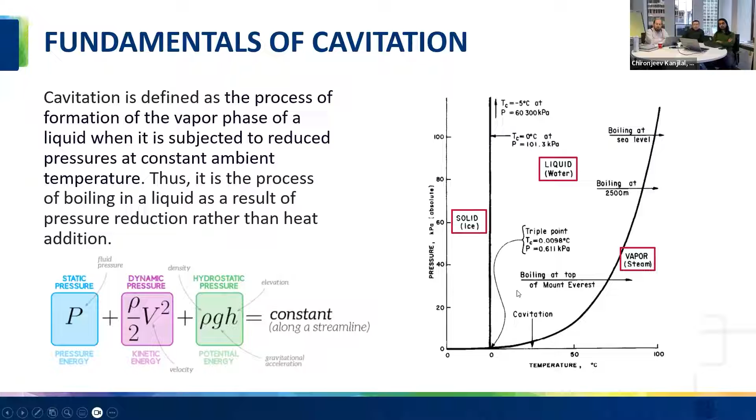Come back to the diagram. Basically, when we increase the velocity, the pressure will drop. And if the pressure drops below this line, water will enter the gaseous phase. We call that cavitation - basically, small droplets of water within the body of that water will bubble up, and that's what's called cavitation.

However, as we close in on the offset, the actual distribution of water velocity across the depth of its body will change, and velocity immediately downstream of the offset will increase substantially. Remember, the square of velocity will make this change even worse, even larger. So the pressure will drop substantially, and that's what happens in this eddy immediately downstream of the offset.

Let's imagine that this is a spillway chute, and we have two slabs that are not really joining at the joint. The situation will immediately switch to a cavitation situation.

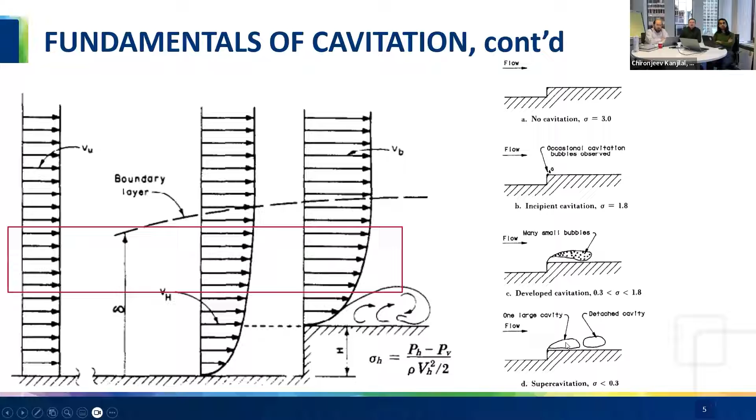Why is that important? That's why cavitation happens in the first place. The problem with cavitation is that it's very temporary. The bubble forms, and immediately due to the rest of the water body exerting pressure on it, it'll collapse on itself.

No concrete can withstand that, and even steel is dented by this because it's basically a shock wave at super speed from the actual process of collapse of the bubble. Then, when collapse happens, the local velocity around that collapse increases again - so basically, it feeds on itself, producing another drop in pressure and another bubble in the water flow.

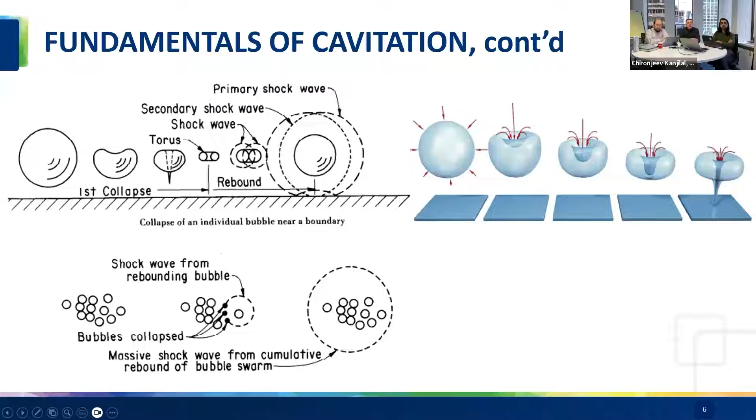That's why we have damage to the structure, because it is like a jackhammer on steroids. It starts chipping off the surface of the boundary. This is how it looks and where it happens. It happens in both offset into and away from flow.

Those are the first two examples. It also happens on the curvature away from the flow. Usually what happens, even in well-built spillway chutes, also on an abrupt slope away from the flow, damage happens immediately downstream of the change of surface.

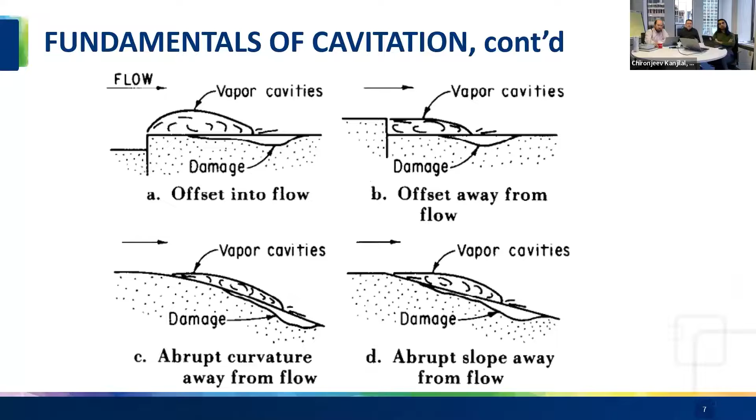Two slabs have to be built separately because that's how we build chutes. It would be ideal if it were all cast in one piece, but that's practically impossible. And also, if you remember the previous slide, even in solid and continuous structures, due to some other issues, we can have a roughened structure and cavitation will happen regardless.

So in this case, the slabs were joined properly with rebars and dowels across the joint, to prevent differential settlement between the two slabs. However, cavitation happened due to the roughened surface and the mere existence of the joint. So the cavitation eroded a lot of concrete all the way down to the rebars and all the way down to the water stop, as you can see here.

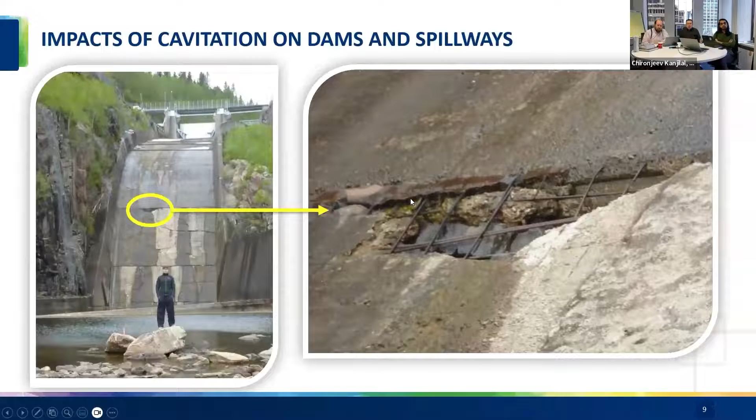So this is my last slide on cavitation, showing what can happen first. We have erosion of a concrete slab to the extent that now we have an opening that will allow access of water underneath the slab. So in that time, the process of uplift on the slab due to just access of water underneath it will happen. So now it's time to talk about the uplift.

We have no drainage on this structure, so this is a natural condition in a good foundation of the dam. The uplift will have this form because at the upstream end it will be equal to the hydrostatic pressure exerting at the upstream face of the dam, and at the toe the same from the downstream side. The straight line tells us that the pressure is dropping due to the hydrostatic drop across the foundation of the dam. That's not always the case, and we will see that on the next slide.

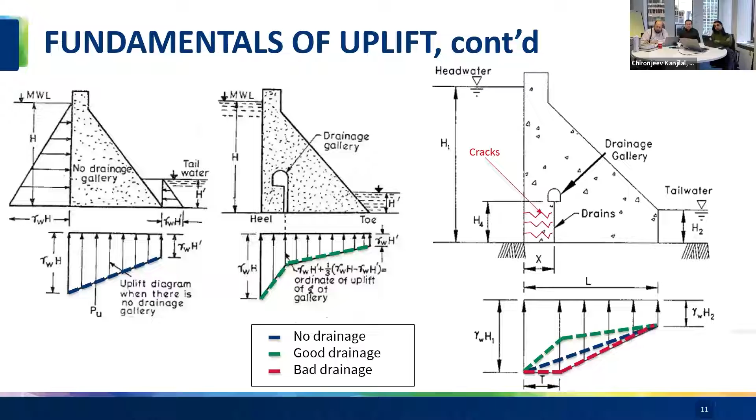If it can move structures like this, it's not a surprise that when water enters the cavity underneath, even if the drainage is done properly before cavitation opens holes in the slab, water entering holes underneath the slabs can easily lift them. After that, it's all erosion and forceful removal of the slabs and substrate material.

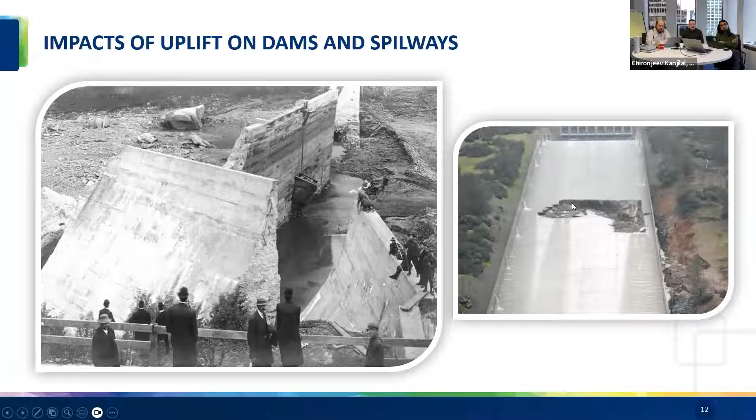So on this diagram here, shown more clearly to the right, it's the same diagram. We're showing all the forces that are exerted on a joint between two slabs.

We have cavitation that works from the top, uplift that works from the bottom in the upward direction, and ice cycle that makes the whole process worse because it will erode concrete even more, especially when it's cracked or has voids inside. And water flow forces, because now, due to the offset in the slabs caused by uplift and cavitation, the upstream lip of the slab is now exposed to the forces of the flow.

How do we prevent this? First, we have to prevent two issues: cavitation from the top, and with drainage, prevent the uplift pressure on the slab even before the joint is offset.

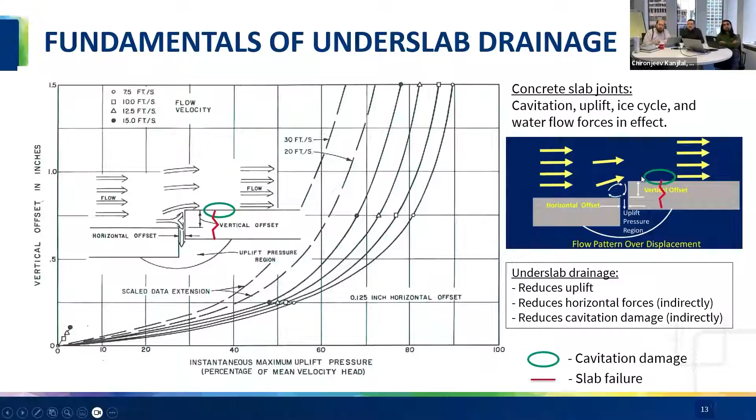Proper drainage, which my colleagues Chironjeev and David will talk more about later, will prevent the uplift, and by that, indirectly reduce horizontal forces on the slab due to the force of flow, and reduce further cavitation damage because the offset will exacerbate the process of cavitation at the top.

On this picture, we can show what the end game is here. The cavitation started at the joint between the slabs and damaged it even more because the drainage at this site, Oroville Dam in the States, was not properly done. So we damaged the first slab, and from there it's all downhill.

The first erosion and removal of the slab will aggravate the situation even more, and in the end, the sheer flow of water will erode the foundation and remove the rest of the structure.

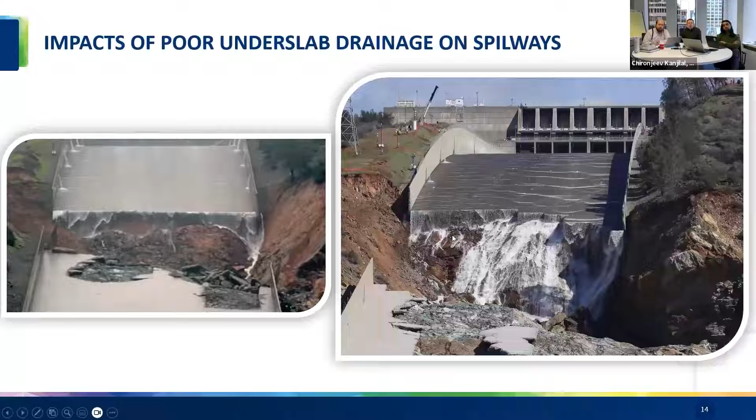So this is the end for my presentation.

Chironjeev and David will talk a little bit more about the actual practical issues with design of the drainage underneath and around the structures. But this is the time to actually hear some questions, if there are any.

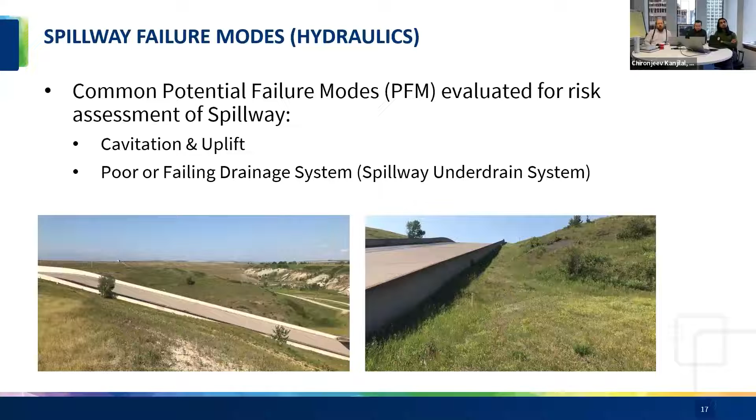So first thing is, when we look at different spillways, there's different failure modes that we explore and review. Today, I'll be concentrating on two of them. The first one is cavitation and uplift, which Dan explained the science of. And then I'll present about the poor and failing drainage system, things to look for, and how to potentially address some of these issues.

So I brought, for this presentation, some examples that are specific to Alberta. The first one here on the left-hand side is the Waterton Dam in Alberta. And as Dan mentioned, typically cavitation issues develop around the joints of the concrete.

You can see here, these are cavitation issues being so close to the edge of the joint. They are happening upstream, and as Dan mentioned, although for the most part these issues do happen at the downstream end, depending on the roughness and the geometry of the surface, they can actually migrate also upstream of the joint themselves. So when you visit a spillway and do your walkthrough, repairs are signs to look for, and then look at the joints and what's happening around those. Look for differential settlement between the joints themselves as well.

The other dam that I'm showing here is an old spillway that was eventually abandoned. But you can see how this St. Mary Dam spillway was constructed, and soon after construction it started to fail in many ways, and there have been many repairs done to it. You can see at the end they added a lot of anchor bolts to try to keep the slab down.

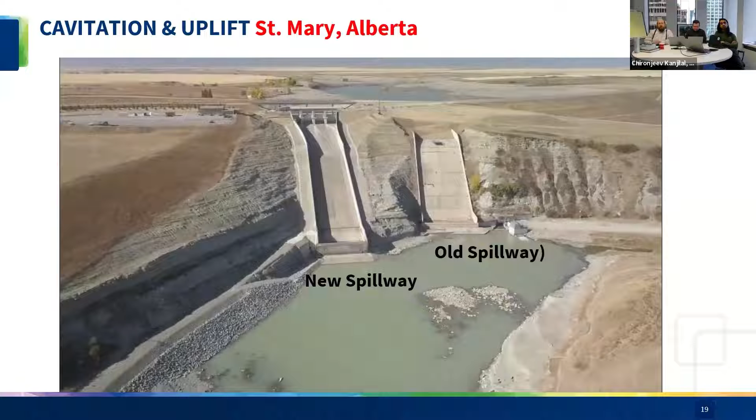One thing to notice right away is the change in the slope. The old spillway is very steep, and this steepness does not help. It's a lot of energy that the spillway has to handle and translate from the upstream end to the bottom, to the downstream end. So trying to reduce and make more gradual changes, I think, is good design practice. Anyway, just wanted to show you how a poor design can lead to a very expensive solution, all the way to having to reconstruct the entire spillway itself.

Now, how do you prevent cavitation? There's a good textbook, Hydraulics of Dams and Reservoirs, by Fuat Senturk. It basically highlights the importance of aeration. If you're able to get about 7 to 8% of air supply in your flow, you're basically able to prevent cavitation. Now, how is that done?

Now, as with anything, these ducts and corridors that are added to the structure need to be inspected. You need to make sure that these are functioning when they need to operate. In Alberta, for example, where temperatures drop significantly below zero, and where you could have an early freshet, some of these aeration systems may be completely frozen. So it's very important to always inspect these and make sure that they are ready for the freshet, for example.

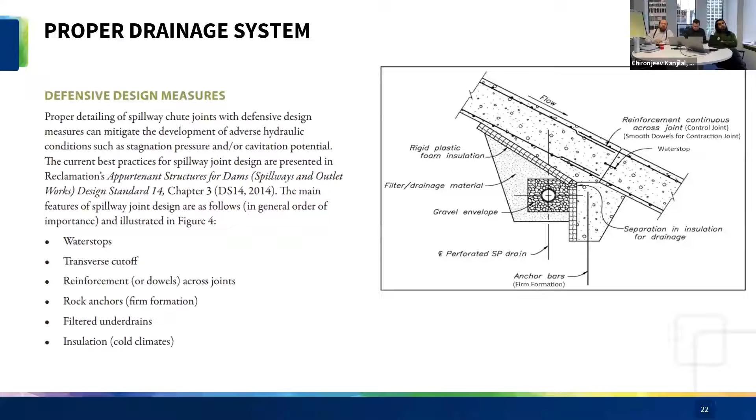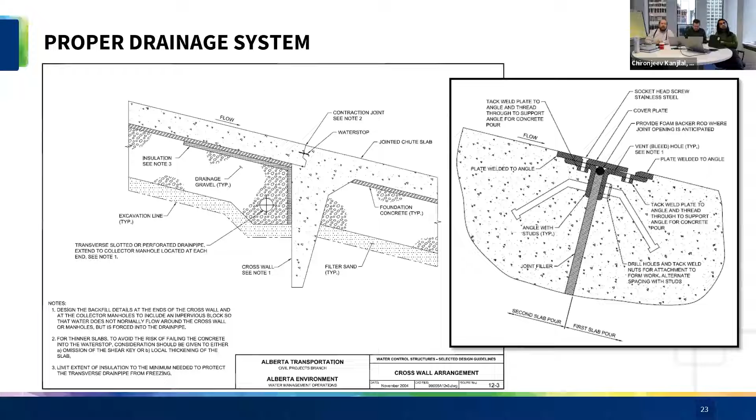So these are things that need to be maintained and looked after for the duration of the life of the structure. Now, one thing that I really enjoyed reading recently is the independent forensic report that was done for the Oroville Dam.

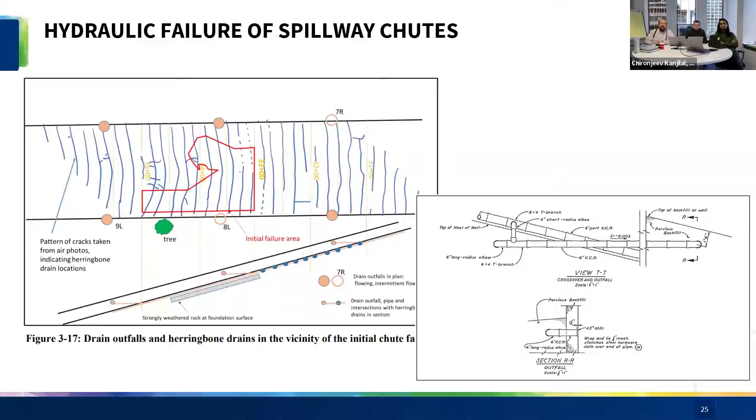Now, these under drain systems were older, and back when these were installed, it was the technology of the time - they used vitrified clay pipes. That was the solution they had at the time. Nowadays, we wouldn't dare doing that anymore - there are too many joints, and the joints don't have gaskets, so they leak. Again, that's not a fault of the design itself - I think the concept was good. The issue is that there was not enough drainage to handle all that water.

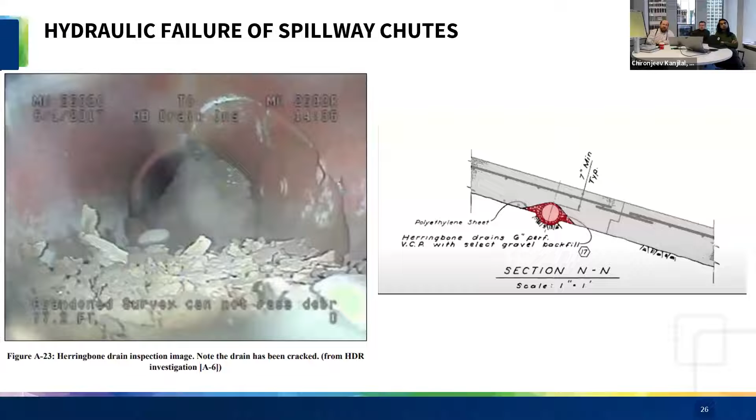Now, if you look at the other figures I've extracted from the same report, the under drain system on the left-hand side here, you can see it had collapsed. Vitrified clay pipe is a very brittle material, so even during installation itself, it's very easy to break them. That's obviously a problem - if your under drains are plugged, they will not work. The other thing too is they were installed underneath the slab, thinning out the actual thickness of the slab. The area highlighted in red around the under drain is just not enough area to hydraulically allow the water to migrate from the surface underneath into the under drain system. So it's always very important to make sure you have enough area there to allow that to happen.

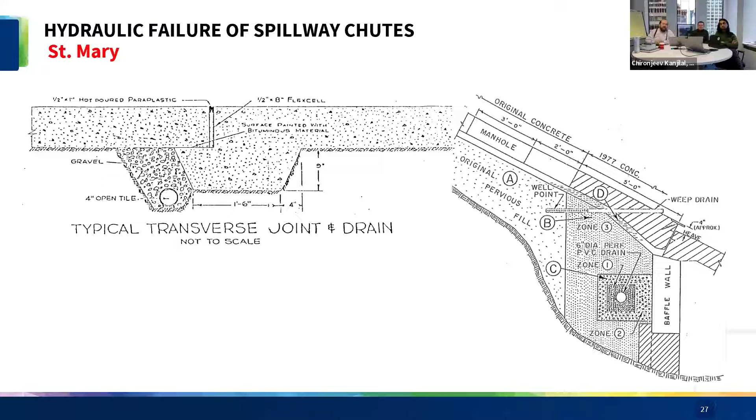Now, this is the new spillway at St. Mary. There are now inspection chambers or manholes, allowing people to take a look at the under drains, see how much water is getting out. This is the picture on the right-hand side - the very bottom of the system. You can see the under drain on the left-hand side, the green one - there's no marking on the concrete suggesting there's no water down there, which is great. Then the larger one, there is a little bit of seepage, but now having access to the under drain, one can go and inspect, maintain, and clean these under drains.

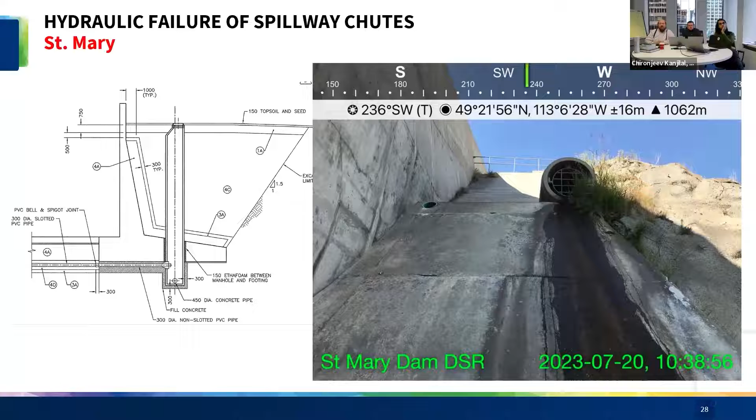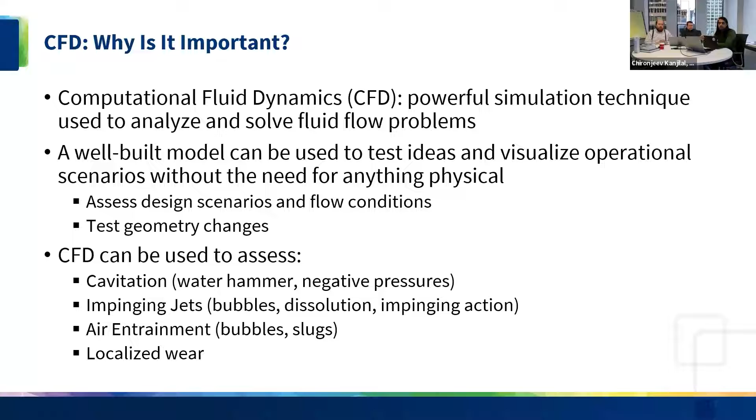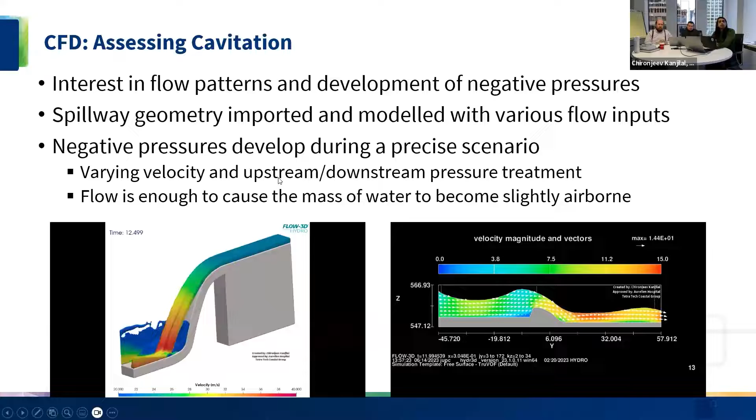In this sort of scenario, you can also monitor the flow upstream and downstream, and if you build the geometry accordingly to account for that loss that causes uplift, you can estimate the amount of uplift that would happen on the downstream slab.

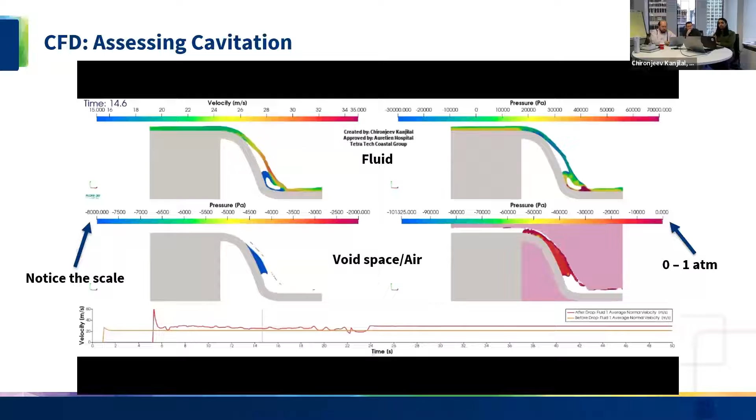You can also take a look at the flow patterns in terms of the velocity vectors, look closely at where wear might occur, and also take a look at things like turbulent kinetic energy and shear.

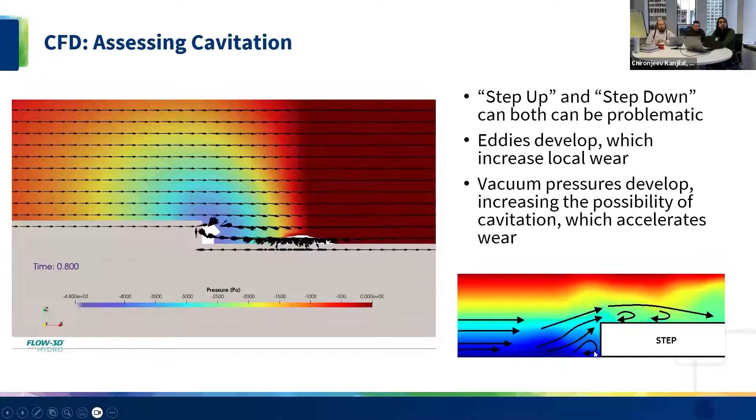In the example on the right, this is essentially the same thing. I've illustrated the vectors here and shown the step up, but the colors represent the pressure and the disturbance, and the eddies that can form at the corner, causing those horizontal forces that Dan talked about, and how cavitation might occur with the velocity change downstream of the step.

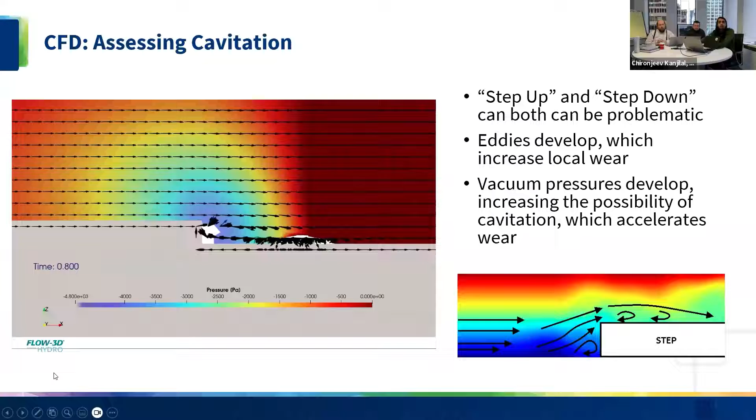And with that, I will give it back to David, who has an anecdote for us, I think.

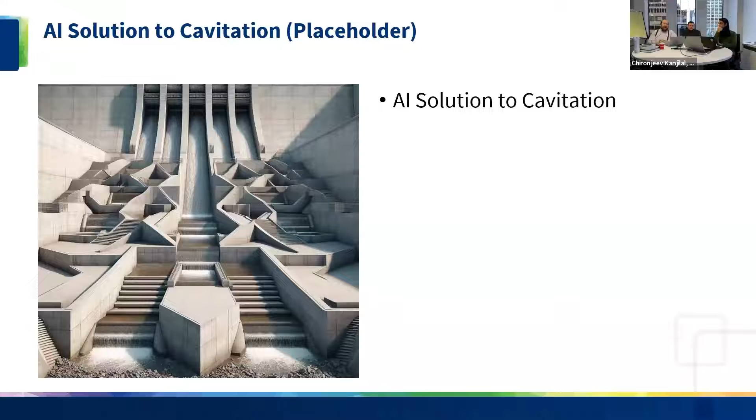That said, I admit it shows the importance of aeration within your spillway, and the importance of adding steps to reduce that energy. Now, I think this would look very good for a water park for kids, but again, I don't think I'll be out of a job anytime soon.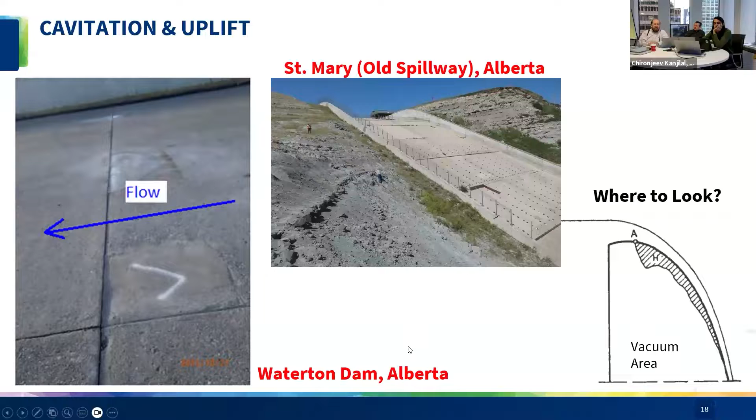So it's right at the top where you have the transition, where you have the greatest changing rate. Those are the areas where you want to introduce air, and that will help prevent cavitation. So in that figure, at point A, that would be ideally where you put your aeration system. In addition, air serves as a cushion within a water body because air is compressible, so it reduces shock waves. Shock waves are in all practicality removed if you have air at atmospheric pressure introduced into the flow.

All right, thank you. One last question before we continue. Can you discuss the merits and challenges of defining anticipated real world performance and extent of cavitation using either CFD or physical models? They both have their advantages and disadvantages. Any thoughts as to which method is preferred over another?

I didn't really talk about this much, I guess, but let me just read the question at the same time. Oh, it's not. Oh, sorry. I guess it sounds like essentially CFD versus, or any sort of software versus a physical model.

Ideally, you can use models like CFD. The advantage is you don't always need a physical model to accompany it if you can validate the system. So if you have an existing spillway, if you can validate the flow conditions for how it has historically operated, then you can have a high level of confidence in the model, and assume it's going to be quite reliable if it's replicating those conditions. Then you don't need the physical model because the model is validated to the system. Any changes you make should be representative of what you should see.

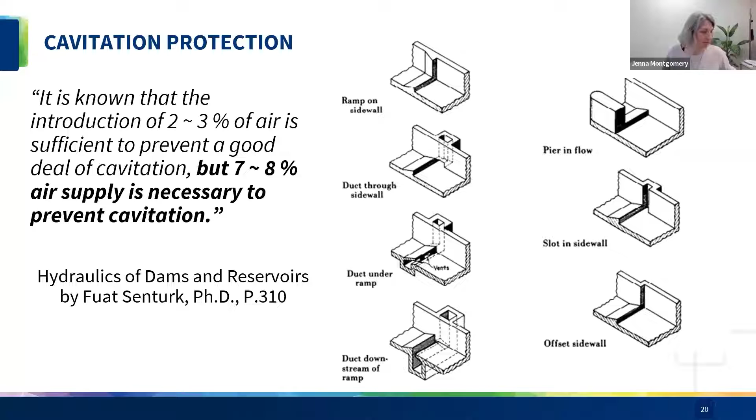Great, thank you. And I guess we'll move along. Bozena, I think you're up next.

Okay, I've just answered the prompts here. So we had the fundamentals of cavitation and uplift, and cavitation affects the top of the slab, and the uplift affects the bottom of the slab. And then, of course, there are drainage issues that were all discussed, and this is how I want to tie my concrete and grout to the presentation. Because ultimately, all these failures, whether it's faulty design or change of conditions or anything else, result in materials failure. So this is your concrete.

That could be your grout. There could be construction issues. This is why I'll be talking simultaneously about concrete and grout, and new construction and old construction, because especially in new construction, selection of material and construction practices can make it or break it. We can design to the best of our knowledge, but ultimately, if material fails, it's a failure.

Now I'll quickly touch on concrete material selection. There are a lot of things. There are CSA standards. There are structural considerations where the main consideration is compressive strength. And then there are also environmental considerations when we look at durability, such as high sulfate content in the soil, alkali aggregate reactions in rocks, but also climatic conditions, especially freeze-thaw that can affect the surface quality on top of roughing from the cavitation.

And then, of course, there are placement requirements, such as flow around the steel reinforcement since it's reinforced, maximum aggregate size selection, and concrete consolidation, very important. And what is even more important is how do we construct the joints. We cannot construct anything in one simple pour. So when previous speakers were talking about failures, they usually happen in the area of joints.

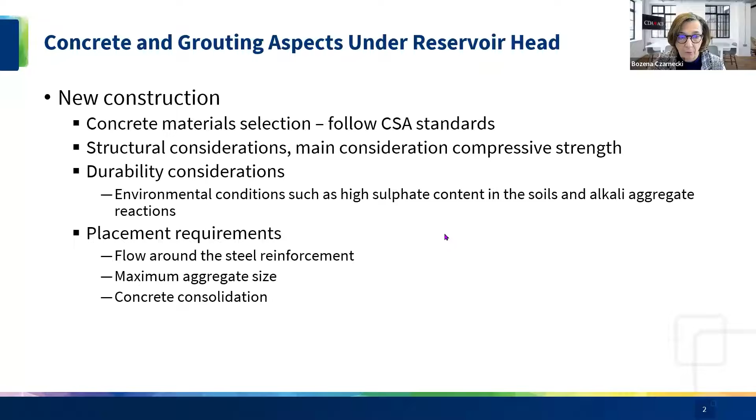So this is the concrete side, and for grout, this is a very proven methodology for installing up gradient and down gradient in the foundation, these are grout curtains. Typically used when the rock formation below the existing or new dam is pervious and seepage is expected. This is the way to limit the seepage. Basically, it's somewhat designed by the spacing between the drilled holes that are filled with grout to form what we assume is a continuous curtain in the foundation. And of course, if seepage passes through the curtain, it is collected, or assumed to be collected, by a row of drainage holes.

Everything is perfect, minus the fact that when it comes to concrete, we get to see it. When it comes to grout, we actually don't. So we make the assumption that when we design it and it's properly placed, it satisfies the function it was designed for. Sometimes we find out the hard way.

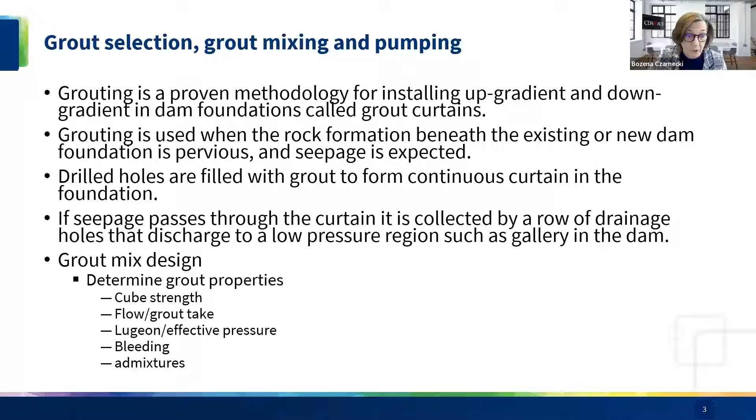The best way for grout mix design, we should be very clear in our specifications. Grout properties, cube strength is only one of them. Flow and grout take, Lugeon versus effective pressure, bleeding, and the selection of admixtures. The admixtures play a huge role other than Portland cement and super plasticizers, especially viscosity modifiers, for how to keep grout properties stable. There is always another requirement of bleed 2% or less. This is the most common. Again, water cement ratio is selected mostly for strength.

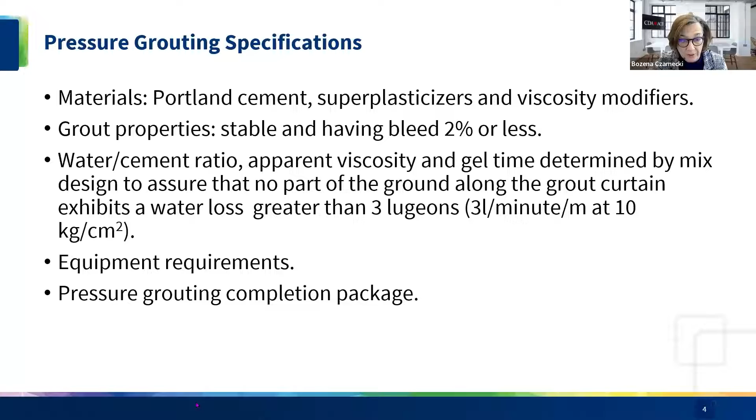Then I'm circulating back to concrete, because an important part is how do we form it? How do we have uniform concrete batching for slump and air so we get consistent properties? How do we make sure concrete cover over steel reinforcement is what it's supposed to be? Because if it's less, we are accelerating corrosion of the steel and another type of failure. Then there is placing of concrete. There are ways, especially to construct spillways. Then comes concrete protection and curing, which again can make or break our concrete surfaces.

And then we are going back to grout. The same thing we are asking for uniform concrete batching, we also have to ask for grout mixing and pumping, because for both concrete and grout, whether it's new construction or a repair, consistency is the key.

Now I have a few examples here. This is unfortunately new construction, and on the surface of it, it's a forming issue and misalignment. Do you think this is a potential candidate for seepage, or water going under the spillway? Of course it is. Do you think this is a little bit of an issue? The problem is that we try to seal the joints, but it's almost impossible to seal something like this. There are attempts, but this is the first failure, and this is for new construction happening here.

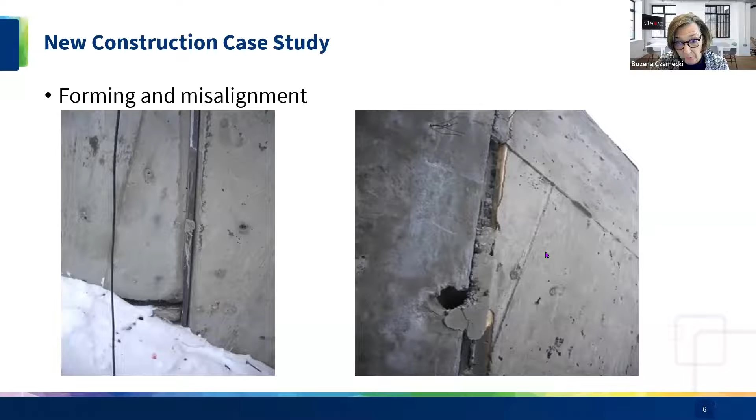Similarly here, when we place the concrete and get something that is a cold joint, we really don't know whether it's only on the surface or whether it goes deep enough to cause problems. If we have something like this in a spillway, right close to the joint between concrete panels, and then we have a cavitation problem on top of that, that is going to be an accelerated failure. Similarly here, when the actual bottom of the spillway is constructed, this is going to be yet another issue.

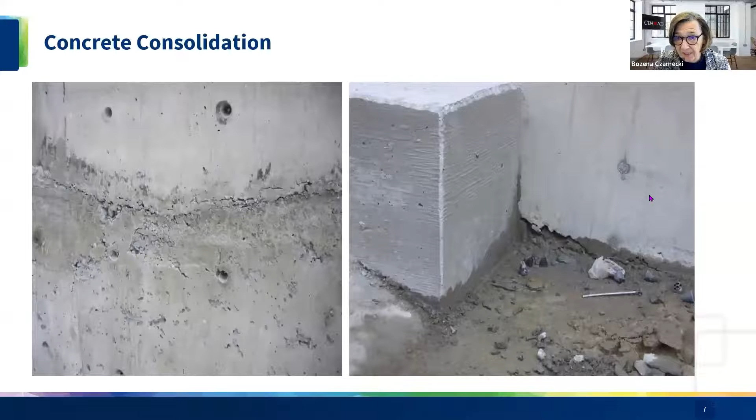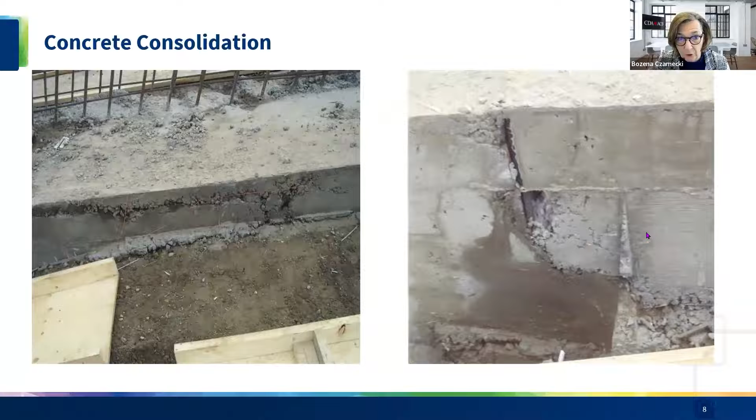So we have to be very careful. The design is one thing, but the actual delivery of the materials in construction is another important issue. Similarly here, it's a big issue. You really don't know whether this is only what's on the surface right against the form, like here, or whether there is actually a deeper issue and the whole structure is affected by honeycombing. This is how it's being called.

So we see it in new construction, and that would accelerate the damage due to all the issues discussed by previous speakers. Then we have old construction where we deal with what to do next. Sometimes it's the upgrade of the design, sometimes it's just the basic repairs. Usually it starts with visual inspection of dam concrete elements, identification of what the issues are, whether it's durability or compressive strength.

That goes through a targeted coring program. You have to select locations that will not impact future dam operation. You test for compressive strength and petrographic examination. I don't want to dwell on that too much, because all these will ultimately define how the recommendations for concrete condition and repairs are going to happen.

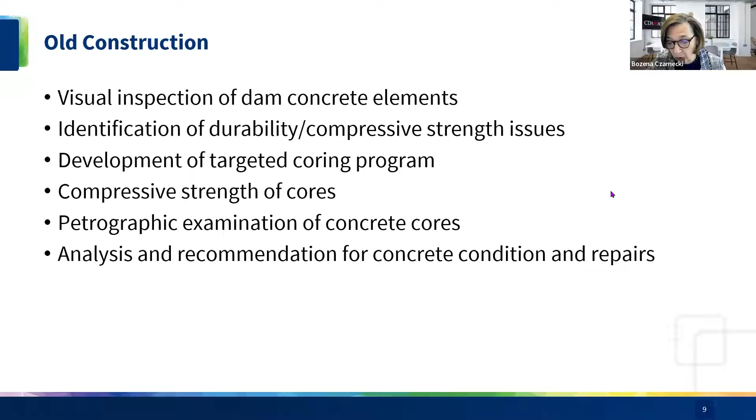And like I said, I want to separate it from the design issues. This is strictly materials, but at the end of the day, it's the materials that are failing. And that goes back to what was discussed before. This is prevention versus protection, and we would rather prefer to be in the preventative side of it.

This is one of the examples. It looks ugly, but not necessarily concrete failure, but the cover was inadequate. And of course, with all the exposure to moisture, etc., that would corrode and eventually result in the delamination of the surface.

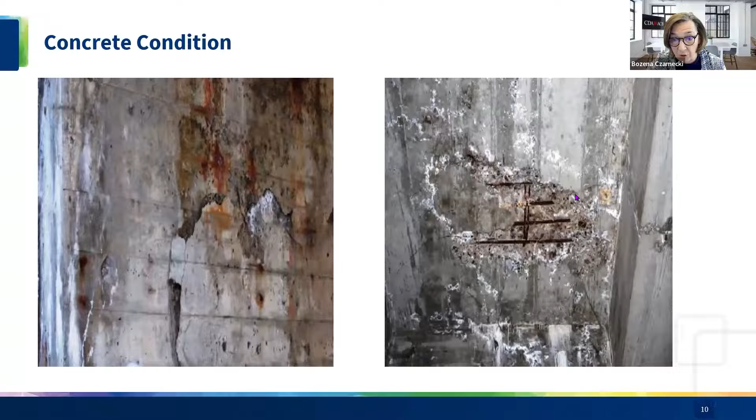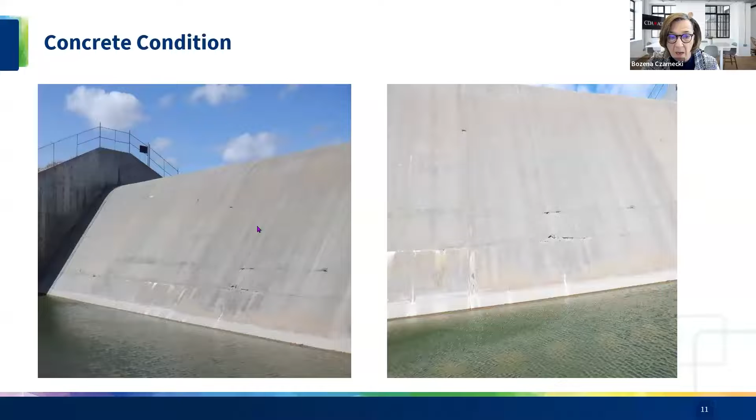Similarly here, if we are talking about cavitation, these would be the prime targets or where it would develop. These are called joints. And again, the concern is, do they go just on the surface or does it happen exactly throughout the slab, which is a totally different issue and a much bigger concern? Surface repairs in this case do not really help to solve the issue.

Here is an example of examination, of course. Sometimes the concrete is cracked, sometimes there is a rebar. By the way, this is not real corrosion, that rebar is in good condition.

And then we get to the life cycle of dam structures. They are designed for 75, 100 years plus. Sometimes the analysis of the older dam structures shows that the rehab could extend the service life, and this is the purpose: upgrade to the current code, extend the service life. The rehabilitation works are very dependent on the durability damage, if there is anything, expected life cycle extension versus cost of upgrades. And of course, grouting operations, again, that go beyond concrete repairs, basically to reduce the water loss. And like I said, this is only materials section, even though the design shows that what fails is the actual materials.

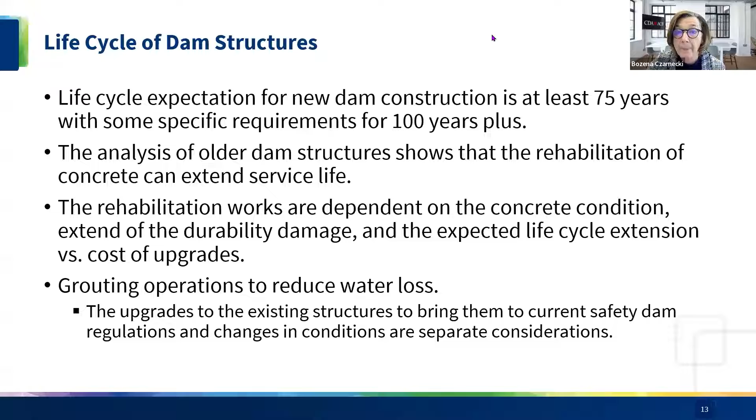And getting loaded. Should be there, yes, right? Yep, we can see the presentation. We can't see you. Okay, can't see me. All right, let me, camera's on. No, it's been off. Okay. Now I hear. There we go.

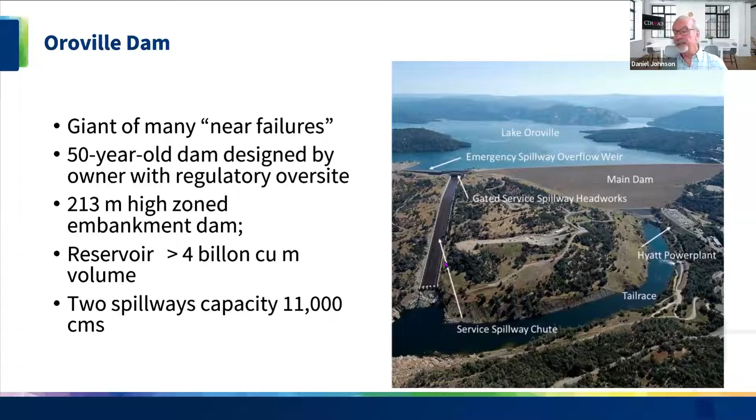It was built in the 60s and 70s. It's a 213 meter high zoned embankment dam. The reservoir has 4 billion cubic meters of storage. There are 2 spillways, and the capacities of the 2 are about 11,000 CMS. So it's a big project. The operating spillway, which is the one that failed initially, has a capacity of 7,000 CMS.

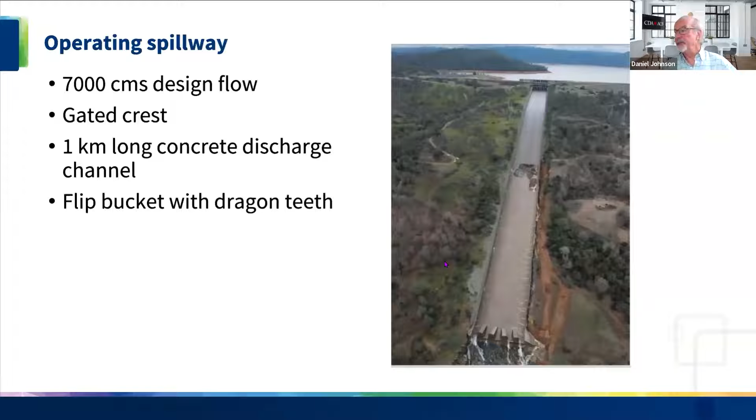QMAX, and then it's got a gated crest. You can see in this photograph, the chute is long, a kilometer-long chute. The upper portion of it's relatively flat. The lower portion is kind of a uniform grade that goes all the way down with a curved transition from one to the next. At the base is stilling with a flip bucket and stilling basins down at the bottom. This photograph is actually taken during the runoff when things were a problem and started to flow. Emergency spillway was to the right of the dam and the operating spillway, and this is the post erosion photograph of that.

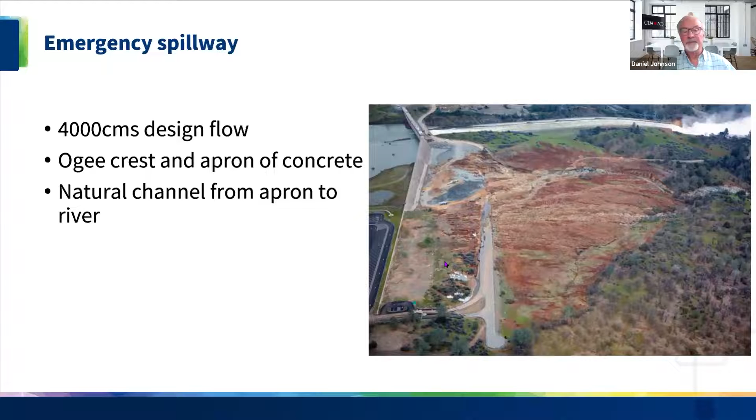You can see the operating spillway at the top of the photograph, and the emergency spillway is the concrete structure extending from the right of that gated spillway. It has a design flow of 4,000 cumecs and an ogee crest. It has a concrete apron, but from the apron down to the river channel it was just natural soils and bedrock. The understanding was that the bedrock is sufficient to handle the very rare opportunity for an emergency operation of that spillway.

That flood event that occurred was kind of a problem for everybody. They had excellent snowpack, a wonderful year from the Sierras, and a warm spring, so runoff happened very quickly. The reservoir filled quicker than it ever had before, and there was a lot of snowpack left. So there was real concern about managing the existing water that's here, but also planning for additional water coming down.

The discharge initially was through the gated spillway, which was the plan and always been used. The emergency spillway had never been used. Initially they started watching things carefully but observed some damage. When they started observing damage in the principal spillway, they closed the gate a bit, reduced the flows, and moved water up so it would go over the emergency spillway. They ended up going back and forth between spillway flows because they'd see damage in one, move to the other, see damage in the other, and try to minimize the damage occurring to both. So it was a real struggle to figure out which spillway to use.

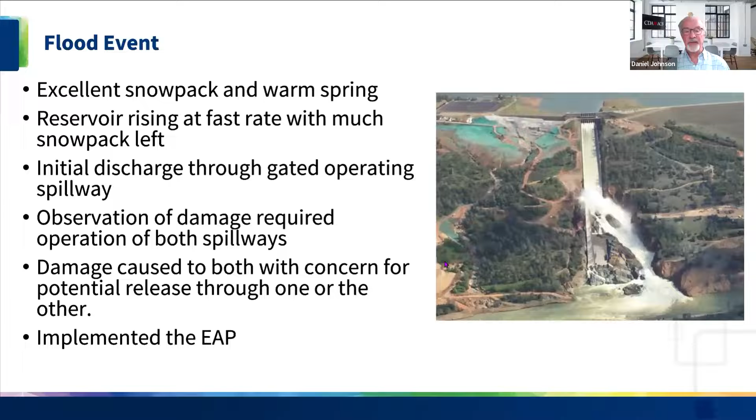They finally got to the point where there was still water coming in. You can see in the photograph on the right that the spillway damage occurred. It started to move up gradient, and actually tore out the left side of the spillway. There was concern that it would progress up and end up in a full failure of the dam. So they did implement the emergency action plan. You probably heard they evacuated about 160,000 people. You can imagine the distress that caused.

It was a progressive failure, as these all are, as we've talked about throughout this. Initially, in that photograph at the beginning, the deterioration there, whether it's caused by cavitation or uplift, my personal opinion is it's both. If you see where that initial erosion or destruction occurred, it's kind of in the points that David was talking about with his cavitation issues. Once the channel was broken, once the system was broken, you don't have much choice. It's going to do what it wants to do. And water's very good at taking things apart.

These three photographs show that it initially started with a little bit of destruction, but then it just extended further and further. Using the emergency spillway, it pretty much washed that downstream portion out. The emergency spillway itself stayed in place, it wasn't a problem, but the amount of erosion occurring downstream of the apron was a big concern because there wasn't a lot of safety factor if that foundation had been removed from beneath the emergency spillway.

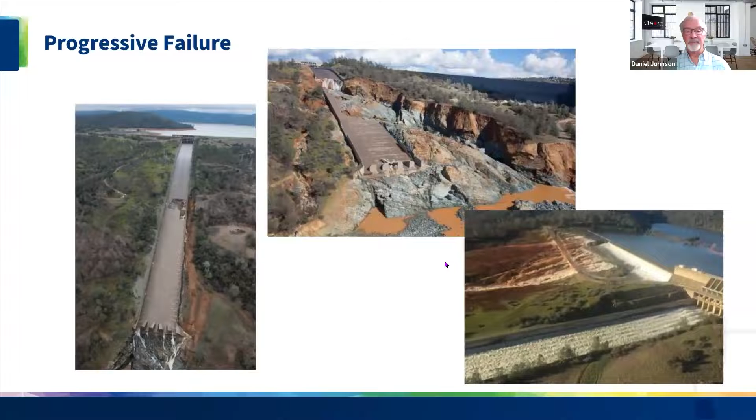A couple of things with that: the discharge was about 4,500 cumecs, considerably less than the design discharge for that principal spillway, which was 7,000. Historically, they'd had flows in that spillway much greater than 4,500 cumecs, up to 6,000 cumecs about a decade before the incident occurred. So the spillway was in good enough shape a decade ago to manage a flow much larger than what it could manage now. Something had changed with time, and to me that's a big part of all these dam inspections - aging issues.

What was found out, I think discussed a little earlier, was that there were some poor design details in the foundation with drainage and cutoff. Also in preparation of the spillway, there were poor rock conditions - not good, strong rock left in place. That meant they could have erosion if there was water underneath there, and also possible movement because of long-term settlement that may have provided offsets for the chute. Also poor preparation ties in with what Bozena was talking about - construction is really, really important in these things. They found going back through that the construction wasn't done that well, and a lot of inspection was not done very well. The other part was failure to recognize the aging impacts and how that tied to the design flaws.

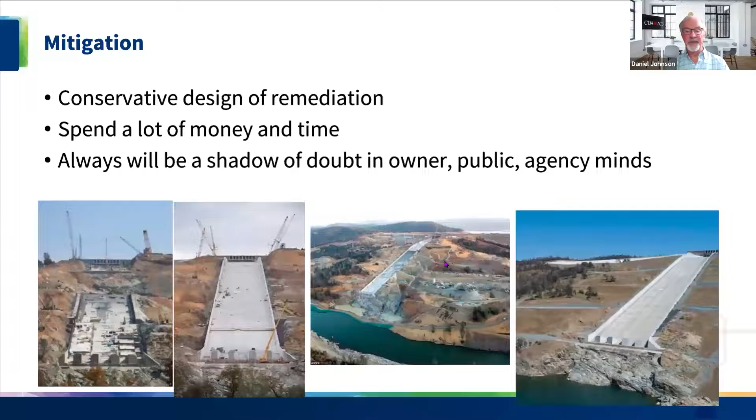But when you've got that large a body of water, you've got to be very careful to make sure you're taking care of issues. One thing about fixing a failure, you become very conservative. You spend a lot of time and money fixing it. And no matter how big your factors of safety are on the repair, there's always going to be a question about what happens if this thing operates again. Not just with the owner, but think about the downstream people who were evacuated. Every time they get a big significant flow, they're going to think, ooh, we have a problem again.

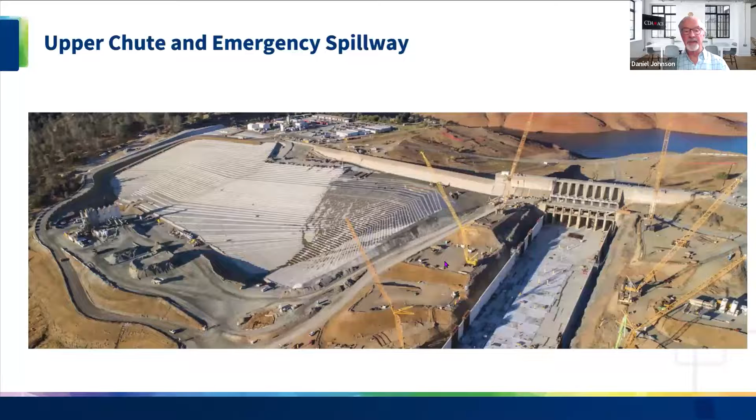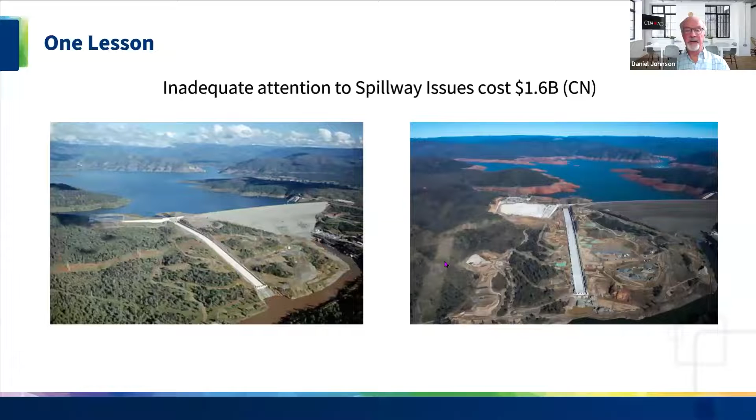My point here is basically that they didn't pay adequate attention to the spillway issues over time. The drains were increasing, the concrete was deteriorating, but they didn't really understand what was underneath. They spent $1.6 billion in Canadian dollars to fix that. So that's a lot of money that could have been used for something else.

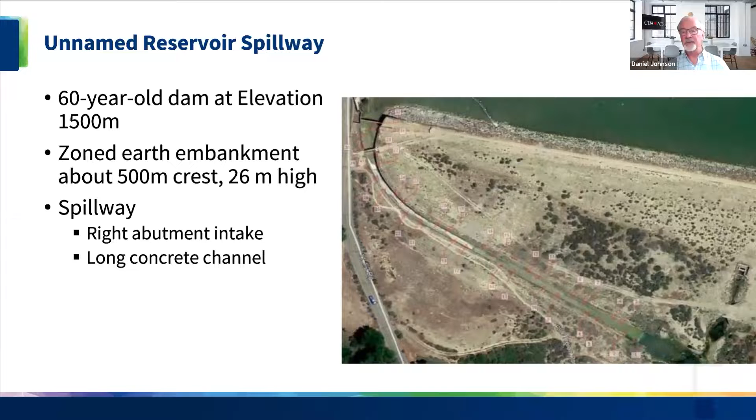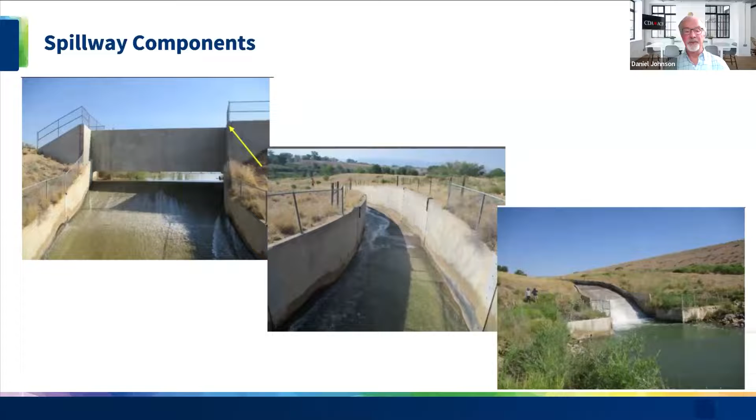Spillway components: there's an ogee crest, a curved channel as shown in the previous picture, and then the stilling basin, and below the water level there are dragon's teeth, just a basin to create a hydraulic jump. So very simple and straightforward, that was put in place back in the 1960s.

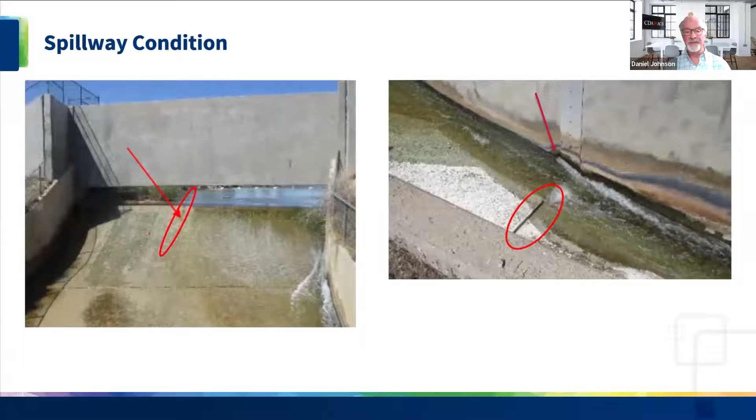Spillway condition, just a couple of highlights here that are hard to see in these photographs, but there is a crack in this spillway. If you note in the photograph on the left, the spillway crest on the left side doesn't have water flowing, the right side does. Something changed. They doubt when they built that in the 60s that it was that uneven, so you start getting suspicion something's going on. Further down, there are some offsets in the joints. You can see the offset circled in the photograph on the right. So some concerns about that.

So all of a sudden you start to get a little suspicious - what's that water doing under there? As I mentioned, there are several locations with vertical offsets in the joints, which can occur during or after construction. There was heave in the middle of that channel, which was interesting - enough pressure to actually lift some of those panels up.

Interesting, the concrete was in very good shape. We did a lot of cores, and the concrete was just fine. So the concrete didn't fail, but some of the other conditions are a problem. They cored the slab and found artesian conditions underneath it.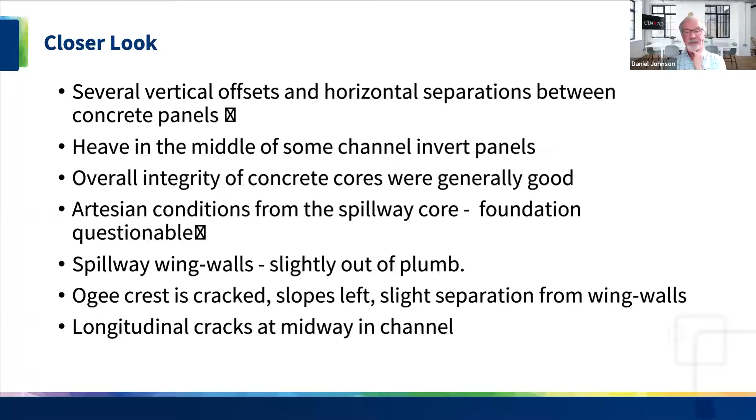And interestingly, the spillway wing walls were a bit out of plumb - they were starting to move in a little, so there was enough pressure that things were deforming with the lateral earth pressures. The ogee crest was cracked and slopes down to the side, and there were longitudinal cracks, probably tied into the heave in the middle of the slab, running longitudinal with the spillway channel. So there was enough uplift that the slab design wasn't sufficient to retain it.

A couple things about this dam - the seepage areas come and go, and this dam has had problems for many years. The foundation has under-drain systems and grout curtains, and whatever else, which are effective to some degree. This foundation geologically has some gypsum seams in it, which we know is soluble. So just a lot of things have occurred with this one.

We do have a pretty good dam safety program here - this project is in Colorado, in the US. And that dam safety program has kind of oscillated between 'this dam is not very good' to 'well, maybe it's acceptable,' and more recently they've said the condition is probably poor and something should be done. So just a lot of issues with this dam relative to its performance, and that ties into the spillway.

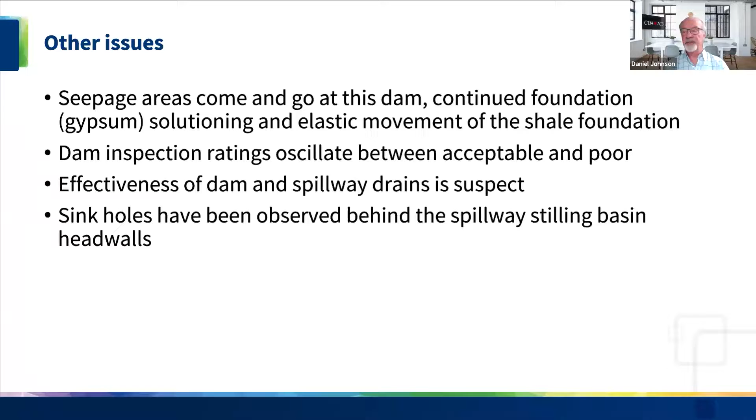There have been many studies done on this dam over the years, because every time they see a seep or a crack, somebody looks at it, does a little study, evaluates it, maybe does some simple repair - nothing that really gets to the heart of the problem. What they're doing right now - this is actually owned by the Colorado Division of Parks and Wildlife, which I think is similar to the Alberta Parks group - they've decided to fix the dams that are dam safety hazards, and a new study is just being started.

That's why I haven't named this dam. But they're going to look at the history of what's going on, do some field investigations, do a finite element or failure mode analysis of the systems we find, and then develop some alternatives and do site selection.

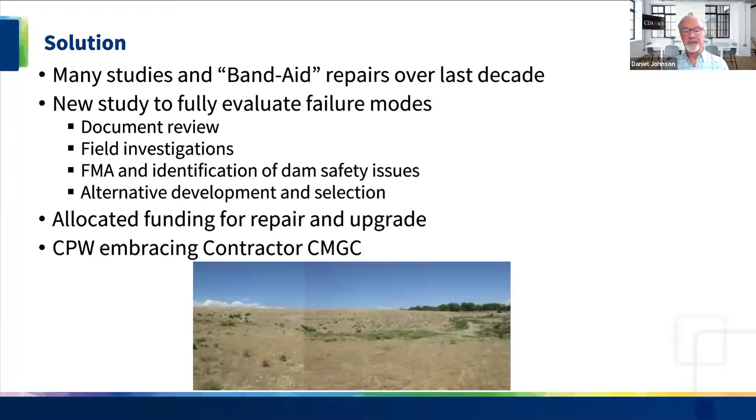The one thing they've done - and I think this sounds similar to what Alberta Parks has done - Colorado Parks has decided they need to fix their dams. They've got 135 dams and reservoirs or lakes that they service around the state, and 35 of those are considered high hazard, so of course they're focused on those. They're looking at getting funds for repairs, and they're embracing CMGC, bringing the contractor in early and working with them. They've had some degree of success with that.

The next one is actually aptly named, I guess, for this presentation, but it's a dam in Colorado - a small reservoir that, again, Colorado Parks and Wildlife works with. It's 70 years old, with a kind of long and checkered history. It's high up in the mountains, at 3,000 meters elevation for the crest. Conditions up there are pretty extreme - very, very cold with lots of snow in winter, and in summer it can get pretty warm with flows and storms. Basically they operate it as a lake, so the reservoir is full all the time. They don't operate the gates other than to exercise them, so the spillway runs almost all the time, almost all summer long - anytime there's inflow, it goes out through the spillway.

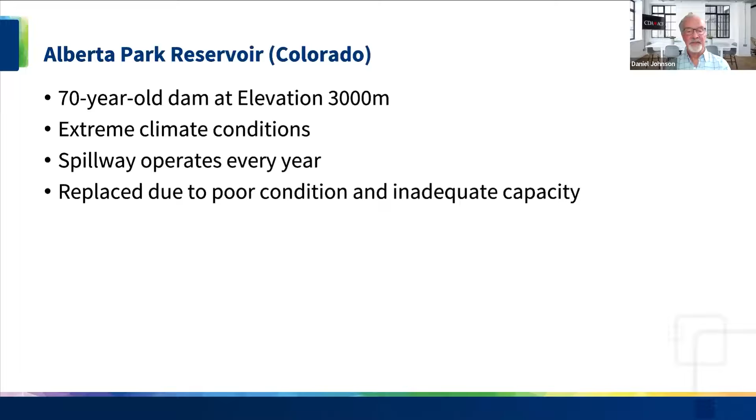The issue was that the spillway's in poor condition and doesn't have adequate capacity for the flood systems that exist right now. So the initial plan was to go in there and fix this spillway.

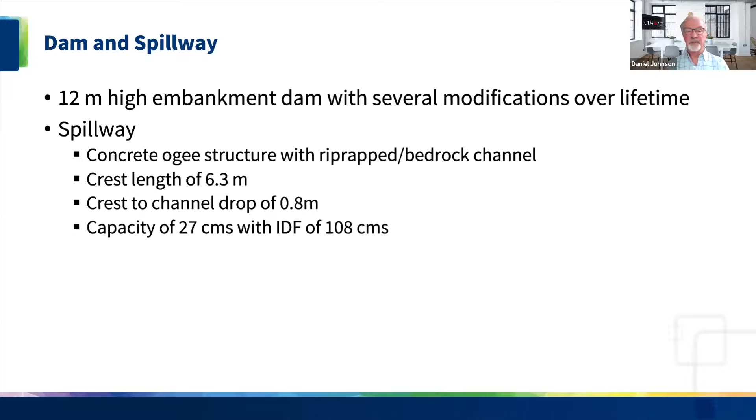The dam itself is small, 12 meters high. It's got a concrete ogee crest spillway, 6.3 meters long. The drop from the crest to the channel is just a little under a meter. Capacity of it is 27 cumecs, but the IDF, the inflow design flood for the spillway, is 108, so way short of the spillway capacity.

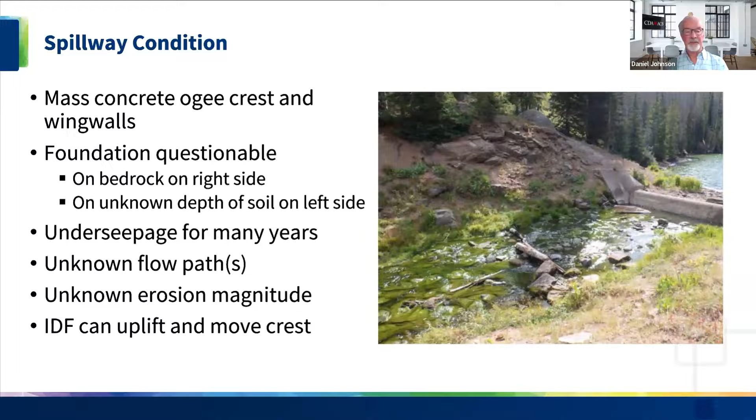Also, there's underseepage. If you note, there's water on both sides of the spillway flowing underneath, and so we don't know what the flow paths are. We don't know what the erosion that occurred may have been, because it's on soil. And of course what we're concerned about is if a big flood occurs, we could actually lift this crest up and do some pretty significant erosion, to the point of maybe actually failing the dam itself.

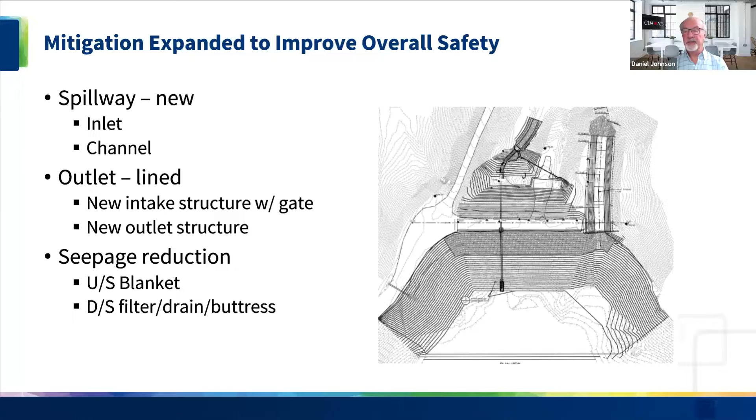While they were there, since they're putting the new spillway in, they thought, well, we've got some other problems as well. So they put in a new spillway and channel, shown in this plan view drawing. And because there's some leakage through the system, they put in an upstream blanket and downstream filter and drain in a buttress. The outlet works was in pretty poor shape, so they went in and relined the outlet works, and put in a new intake structure.

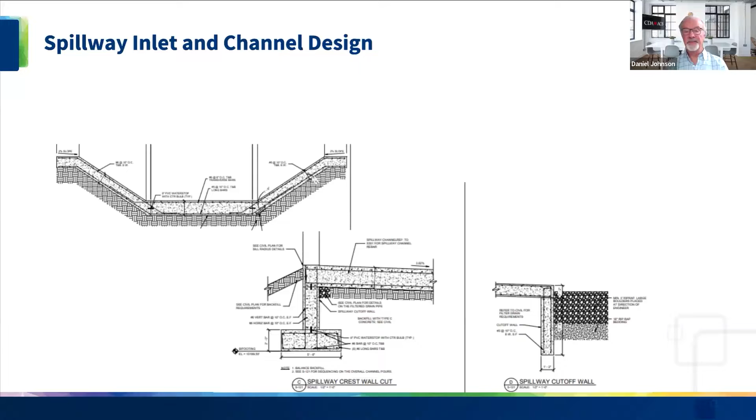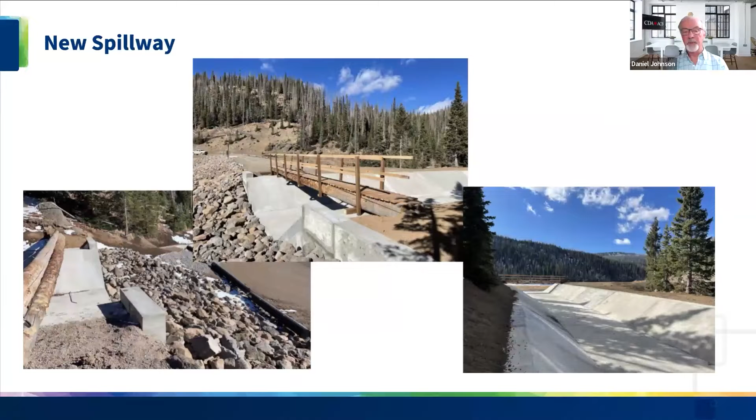This is the constructed new spillway. Looking across, being in a wilderness area, the bridge they put across is a couple of timbers from the trees, to give it a more rustic look, even though the concrete looks brand new. So this is what was put in place. The lower right photograph shows the channel looking upstream, much more robust than what the soil channel was initially.

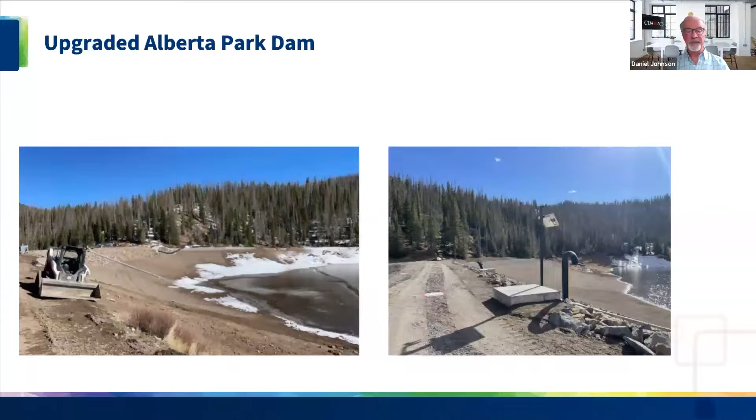So this is the upgraded plan for that dam. It's just finished - I don't have the best photograph, but this is with the membrane and the upstream face, the new crest they put in place. One thing you'll note is the riprap is only at the top, and the reason is that this reservoir is not a reservoir, it's a lake, and they plan to always keep it as a lake. Should the design operation change, if somebody picks it up as a reservoir sometime, they may have to go ahead and put in some additional riprap, but it was a cost-saving method.

Anyway, just to close a little bit on case studies.

Inspection and monitoring are critical—those are really important. And it's not just to look at what you see, but go back into the files and see what's important. My opinion is proactive upgrades are priceless. You can let things fester, but they're just going to get worse. As we've talked about, you can put temporary repairs or band-aids on, which help, but you need to look at it very carefully.

It's important too to do thorough research. This happened on Oroville Dam—they didn't do thorough enough research in their dam safety evaluations to understand the condition under that spillway.

The other part is expect surprises. The thing that I actually thoroughly enjoy is going back and looking at these upgrades and trying to understand what the original designers and constructors did.

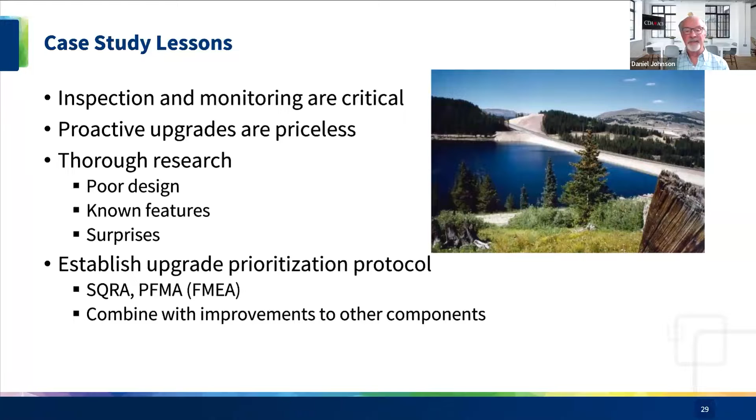One thing in having multiple dams is having some sort of protocol, and of course failure modes analyses are very helpful with that. Doing portfolio failure modes analysis is very important. And one thing is when you're going to go out there and fix some part of the dam, ask: we're going to be there anyway, can we do something else? So that's the end of my presentation.